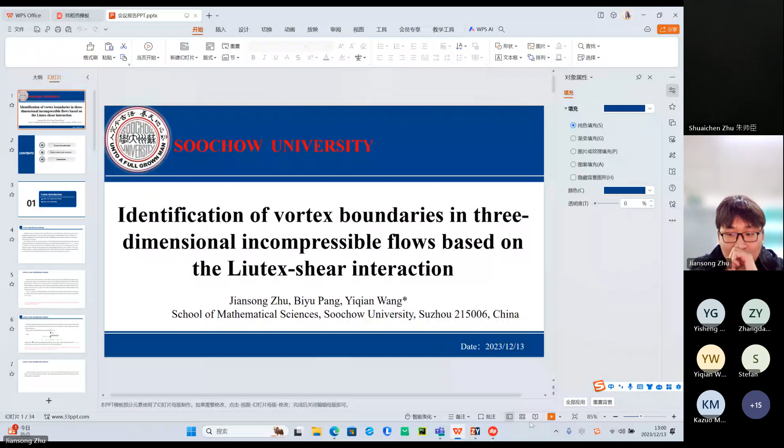Okay. Can you hear me? Yes. Okay. Can you see the screen? Oh, yeah, we can. Okay.

Hello, everyone. I'm Jiansong Zhu from Soochow University in China. I am a first-year graduate student. This is my first time to attend an international conference. I am a little nervous, please forgive me. The topic of my report is identification of vortex boundaries in three-dimensional incompressible flows based on Liutex-shear interaction. This report is divided into three parts: Liutex introduction, observation and analysis, and conclusion.

First of all, Liutex introduction is divided into two parts: other vortex identification methods and Liutex vortex identification.

Although vortex is ubiquitous, it has been difficult to give a stricter definition. The first generation of vortex identification method equates vortex and vorticity, resulting in indistinguishable vortex. Therefore, it is obviously inappropriate for the first generation vortex identification method based on vorticity to represent or capture the vortex structure. In the 1980s and 1990s, the second generation of vortex identification methods

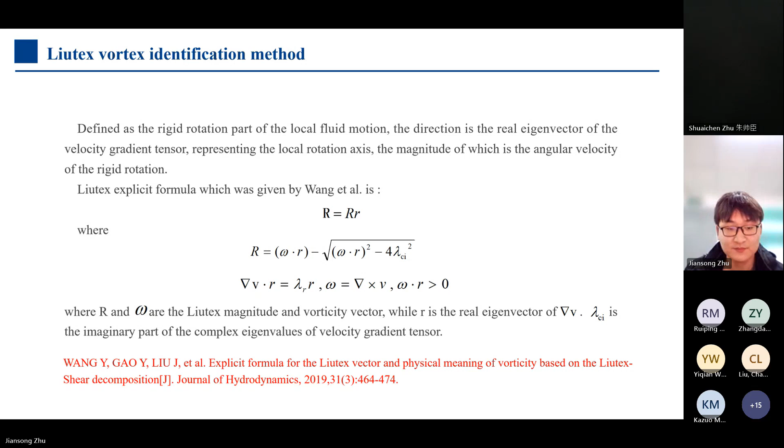A special feature of the Liutex system is that vorticity is strictly decomposed into the rotation part, the Liutex vector capital R, and the residual shear part, capital S. This relationship can be used to study the interaction between fluid rotation and shear in various flows.

Next, I will talk about the advantages of the Liutex method. As the third generation vortex identification method, Liutex greatly outperforms the previous two generations, mainly reflected by: one, the Liutex vector is an accurate representation of the physical quantity of vortex with a clear physical meaning; two, the vortex identification method represented by Liutex solves the problem of threshold selection for the second generation vortex identification methods; three, the Liutex method is able to quantitatively represent the six elements of vortex.

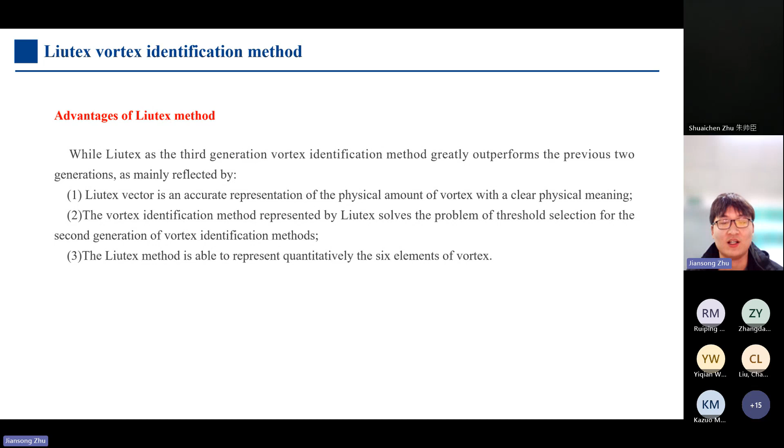Okay, the following is the observation and analysis, which is also divided into two parts: the Liutex shear interaction equation, and the ISO surface and slice of Liutex in flow around the 3-dimensional cylinder.

In order to study the relationship between Liutex and shear, the vorticity transport equation can be used to formulate a governing equation for Liutex in 3-dimensional incompressible flows with a source term depending on the residual shear.

The vorticity transport equation for incompressible flow is: capital D omega divided by capital DT equals omega times (nabla) times V plus nu times (nabla) squared omega.

With the Liutex shear decomposition, the equation can be reformulated as: capital DR divided by capital DT equals capital R times (nabla) times V plus nu times (nabla) squared capital R minus capital DS divided by capital DT plus capital S times (nabla) times V plus nu times (nabla) squared S, which equals minus capital DS divided by capital DT plus capital S times (nabla) times V plus nu times (nabla) squared S.

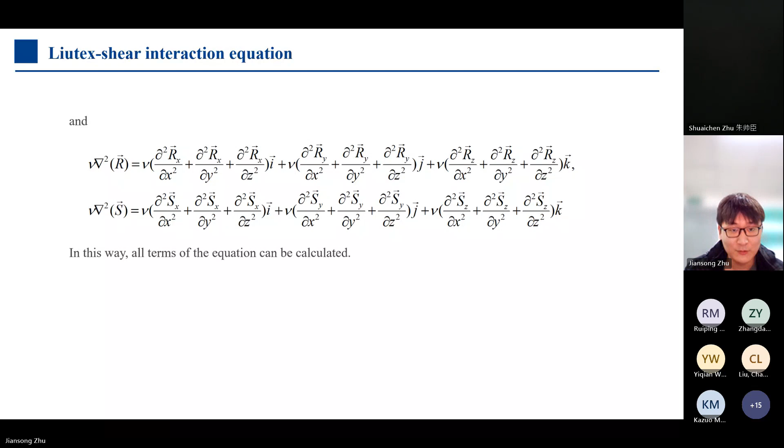This we will call the Liutex shear interaction equation. Here R and S are Liutex and shear. The term capital DR divided by capital DT is the material derivative of Liutex, while nu times (nabla) squared capital R is the dissipative term, and B is the source term, representing the influence of shear on the evolution of Liutex.

The source term B contains the material derivative of capital S, the non-steady term, and the dissipative term of shear. Of course, the equation can be formulated the other way around, combining all Liutex-related terms as the source term, which represents the influence of Liutex on shear. However, in the current study, we will focus on the influence of shear on Liutex, as we are more interested in the dynamics of Liutex.

I investigated unsteady flow around a three-dimensional cylinder with Reynolds number of 300. Its computation domain includes 257 by 128 by 32 grid points in the X, Y, and Z directions. Direct numerical simulation (DNS) is used, and the immersed boundary method (IBM) was used to simulate the cylinder boundary.

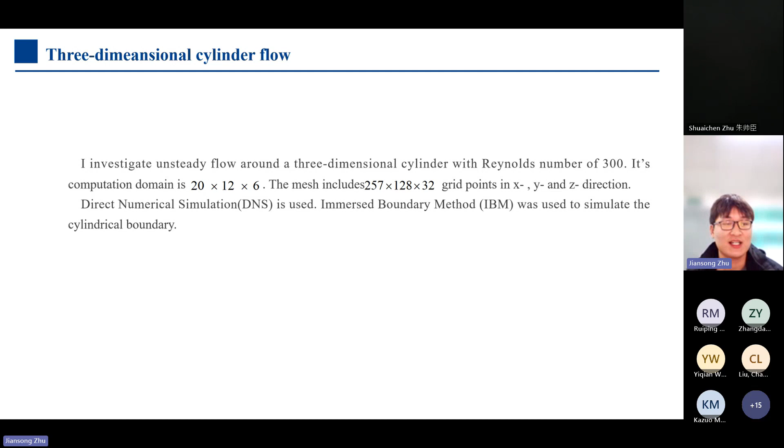Okay, next we take a look at the slice diagram of Liutex component in the x-axis direction. In a three-dimensional cylinder flow, we can see the center of the vortex is positive and the boundary is negative.

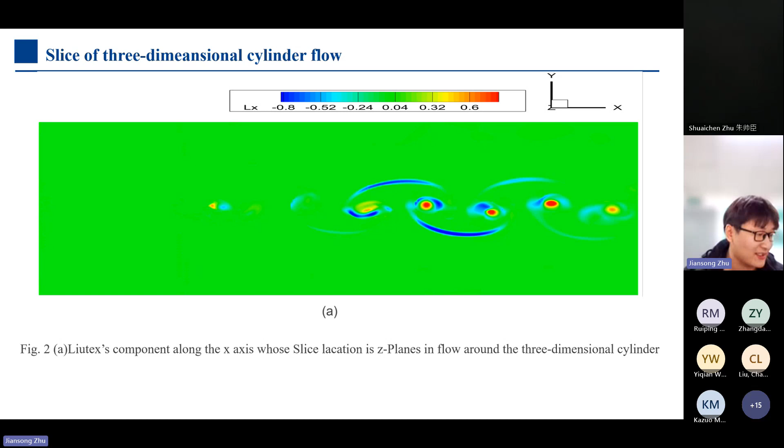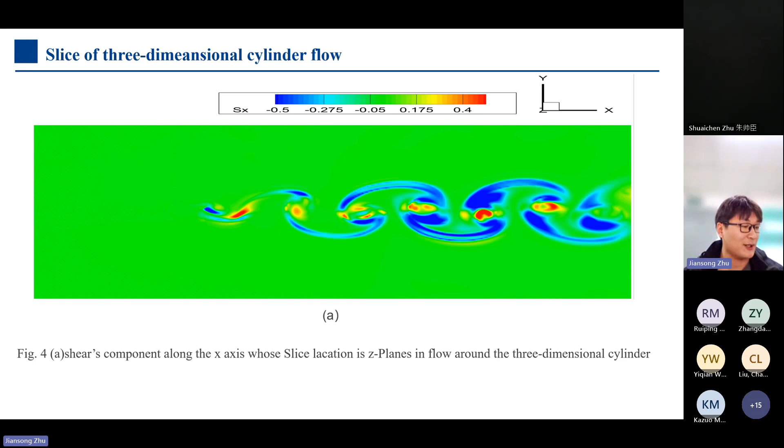Next is the slice diagram of the shear component in the z-axis direction. Compared with figure 2c, the sign of the vortex is roughly the same. By observing Liutex,

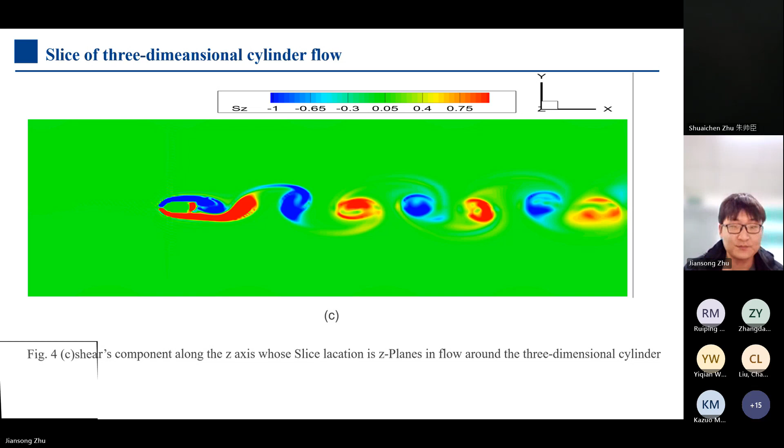the viscous term shear component along the XYZ axis, whose slice location is Z planes in flow around the three-dimensional cylinder, we can conclude that the slice diagram of the components in the Z-axis direction is similar to the two-dimensional case.

So next, I will analyze the slice diagram of Liutex source, Liutex source viscous term, and material derivative of shear component along the z-axis direction, separately, to see if there are similar conclusions to the flow around the two-dimensional cylinder.

Next I compared the viscosity of Liutex source with the viscosity and material derivative of shear in the z-axis. It can be observed that in the Liutex z-axis component distribution, on the vortex boundary recognized by Liutex, the viscosity in the z-axis component is opposite to the sign of Liutex in the z-axis component.

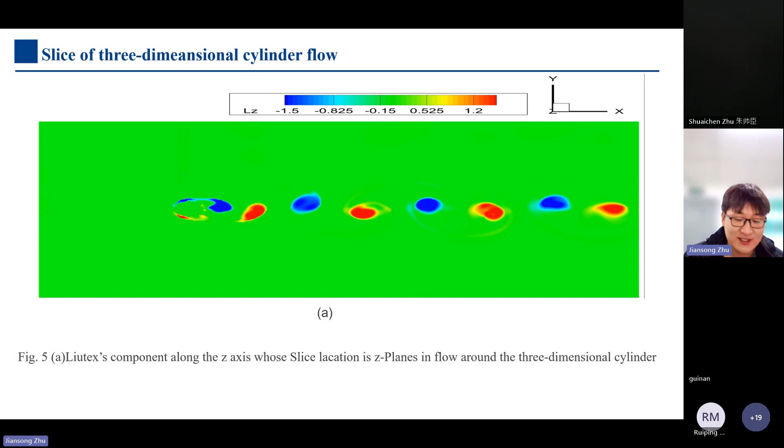It shows that there may be a strong dissipative effect on the boundary.

By comparing the slice diagram of the components of source and the material derivative of shear along the z-axis, it can be concluded that the slice diagrams are roughly similar in distribution. The source term in the z-axis component is mainly contributed by the material derivative of shear component in the z-axis direction, while viscosity in the z-axis contributes less, as shown in figure 5a.

This is the slice diagram of the Liutex component along the z-axis, whose slice location is z planes. The distribution of the source term's component along the z-axis is shown in figure 5b.

First, it is clear that the influence of residual shear on the Liutex evolution is concentrated in those shedding vortex areas, outside which the interaction is rather weaker.

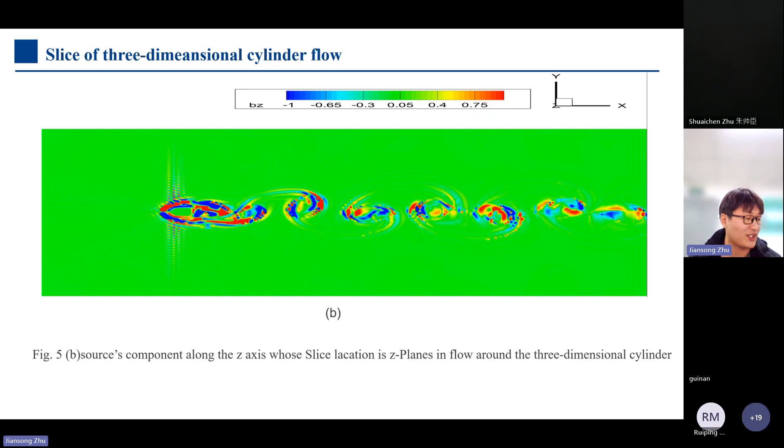Based on the interaction mechanism between Liutex and shear, we find that viscosity acts on the vortex boundaries in figure 5c. I thus conjecture that the vortex boundaries can be identified by those high dissipative boundaries.

Based on the interaction mechanism between Liutex and shear, we find that viscosity acts on the vortex boundaries in Fig 5C. I thus conjecture that the vortex boundaries can be identified by these high dissipative boundaries.

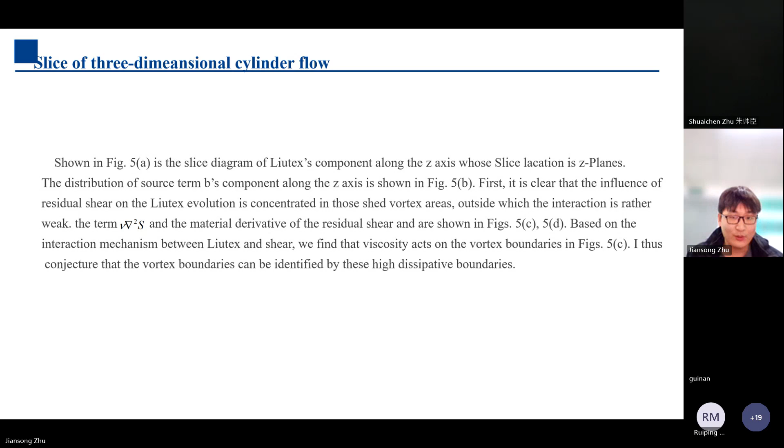Okay, I see. In the following, I try to compare the situation of flow around a two-dimensional cylinder, and we can get the following conclusion.

It is revealed that such boundaries exist: outside, the shear has a trivial impact on the evolution of Liutex, and inside, enhancing and weakening effects of shear on Liutex can be observed. In addition, there is a strong dissipation effect upon Liutex on these boundaries.

In the following, I try to compare the situation of flow around a two-dimensional cylinder, and we can get the following conclusion.

Liutex is the exact mathematical definition of fluid rotation or vortex, which is the only one that correctly represents fluid rotation or vortex.

I conjecture that vortex boundaries might be identified by these high dissipative boundaries, like the flow around the two-dimensional cylinder.

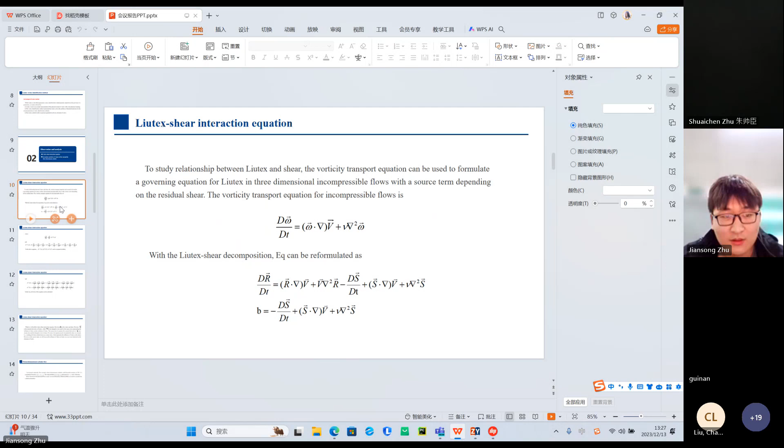I'm just a little confused. Then you try to explain each term. Go to next. Go to next. Yes. Well, let me see. They're here, not only here, everywhere.

So what does it mean, Rx? What does it mean, Rx, or what does it mean, Vx? Rx is... no, I know your definition. R is Liutex. What is Rx?

Rx is the component of R along the X axis. So that means it's R's projection in the X direction, or components of R, right? Well, then Vx, Vy, Vz - I think when you hear Vx, Vy, Vz, they're not the same as U, V, W, but they're all...

Scalar. They shouldn't be vector. So if you look at the Rx vector, you have a head, a vector head - you put the vector symbol there. We know R is a vector, but Rx is not a vector. Rx is a component, a number, or a scalar, not a vector. I think you have a similar problem throughout your presentation. We need to know that R is a vector, but Rx is a component. This component is a number, or we say it's a scalar. So I think we cannot use this vector notation to represent the component.

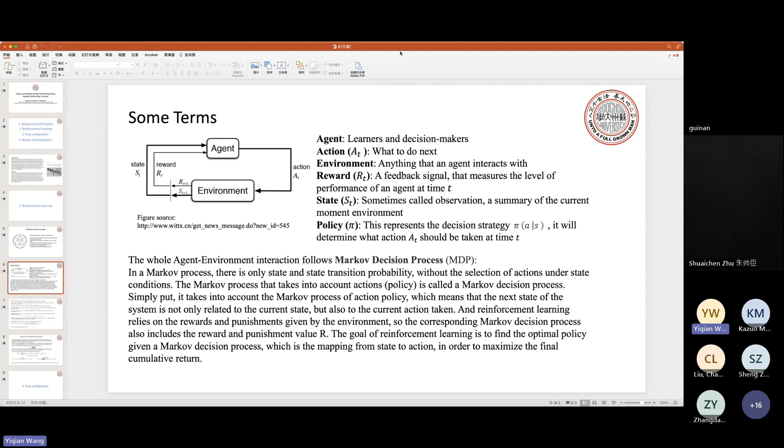Your screen never changes. Your screen never changes. Never changes. Yeah, now it changed. Okay, maybe I should share the whole screen. Okay, share whole screen. Okay, so now, okay, yeah, I changed - see the screen. Okay, screen changed.

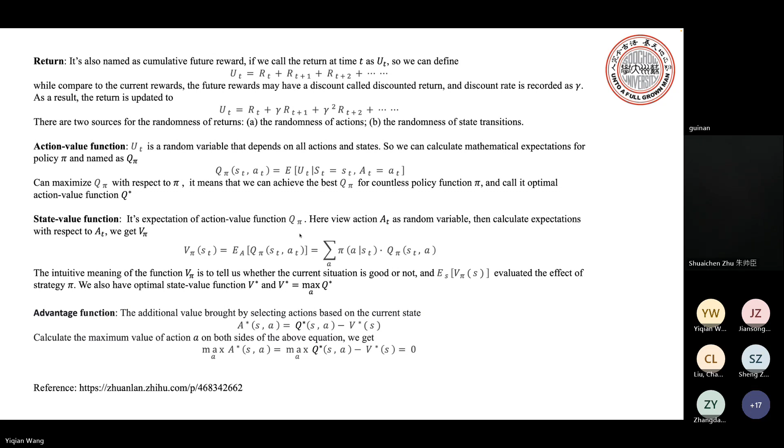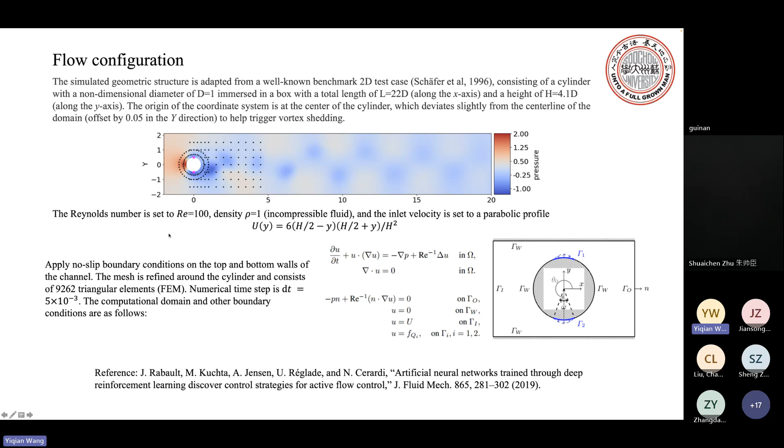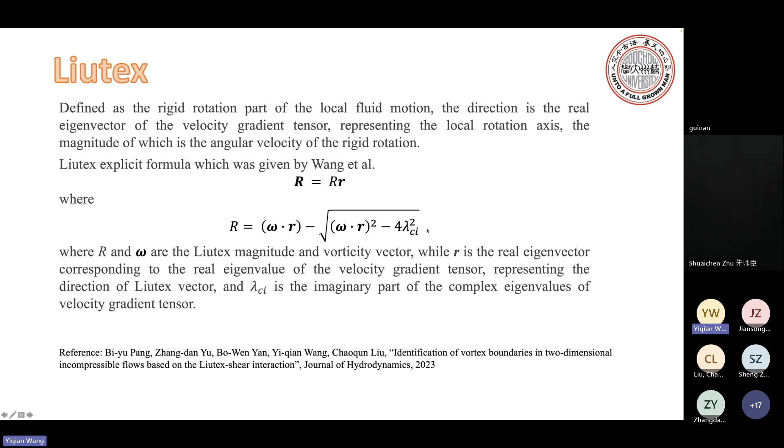We want to try a second approach - to put Liutex, which we believe is the sinews and muscles of the flow, and use that as the information from the sensor points. So we are using Liutex as states rather than pressure as in the previous reference. And I believe the work is ongoing.

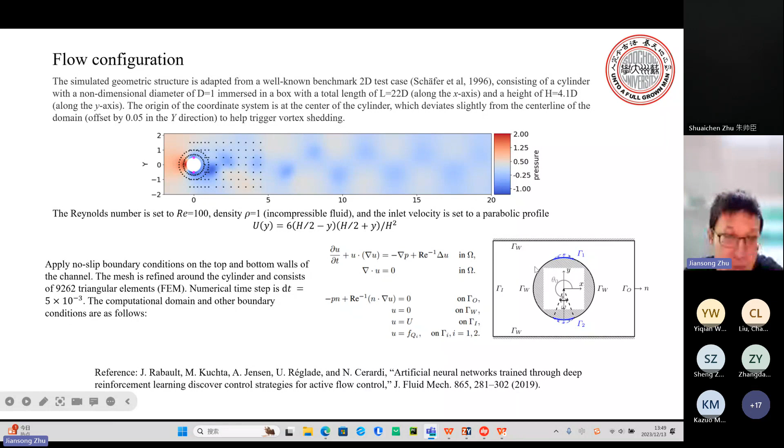You can see the picture. We have given agent, state, and action. Just the reward function is left.

Due to the strong correlation between Liutex and vortices, our desire is to reduce the impact of vortices. So combining Liutex and reinforcement learning is the way to investigate flow control.

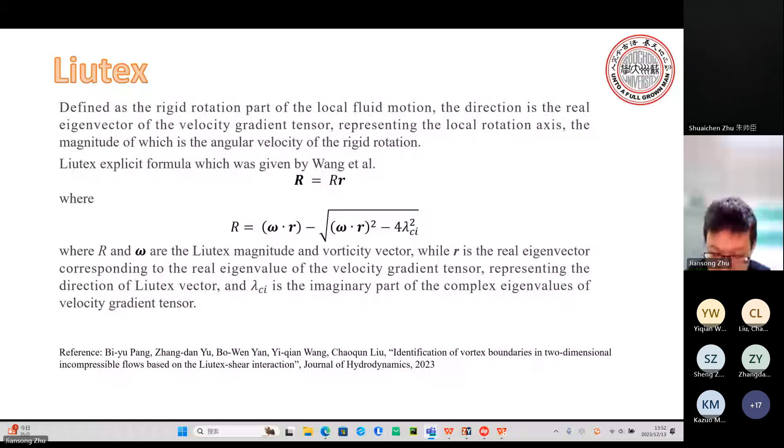0.164, and then during training, the drag decreased to around 0.159. And it makes some drag reduction.

But there are some errors, maybe. I think if there is any other information contaminating the data, it could influence the control strategy. So that's for future research.

My expectation is that we want to do more research on flow control by reinforcement learning. First, we can change the probe positions to extract different flow information and send it to the agent to learn a better control model.

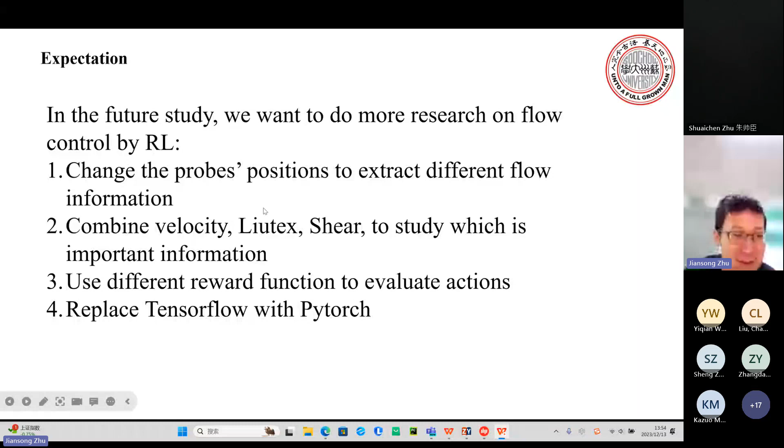Okay, this is all my presentation, my topic. And in the end, welcome to our conference next year in Suzhou, China. Welcome everyone. Okay, thanks for listening.

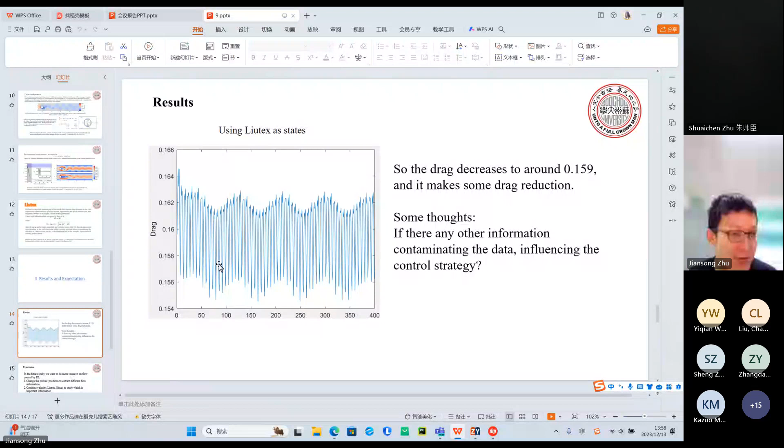Okay, actually our idea is to replace original information by Liutex, which we thought would be more reflective of the flow structures. That's the only idea behind this work, and it is still ongoing. I think you assume Liutex is more important to the frequencies - sounds to me like it relates to the frequency change. But this needs further study.

Yes, thanks, Dr. Liu.

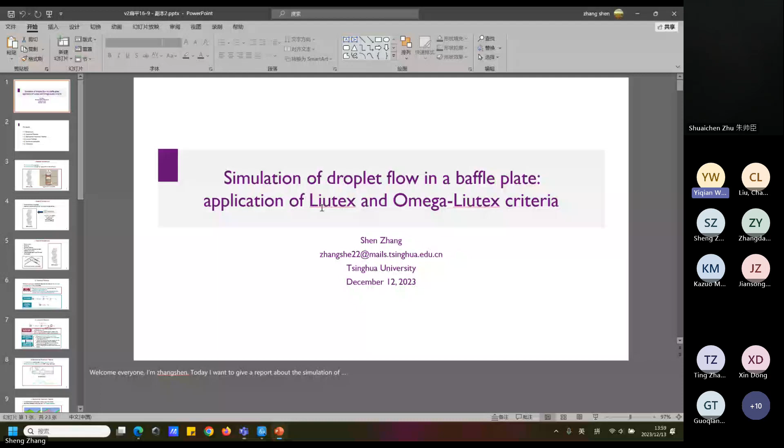Hello, can you hear me? Yes, we can hear you. Can you see my screen? Yeah, okay, I'll start. Hello everyone.

Today I want to give a presentation about the simulation of a wave plate. This is the wave plate - it is used to remove water from the airflow. For example, if the airflow enters the tortuous channel from below, most droplets will hit the plate and become a liquid film and flow down, thereby increasing the dryness of the airflow, and this is what we want.

The performance of the wave plate is generally evaluated by two indicators: the first is the steam water separation efficiency, the second is the pressure drop. The higher the separation efficiency means this wave plate can remove nearly all the water from the airflow.

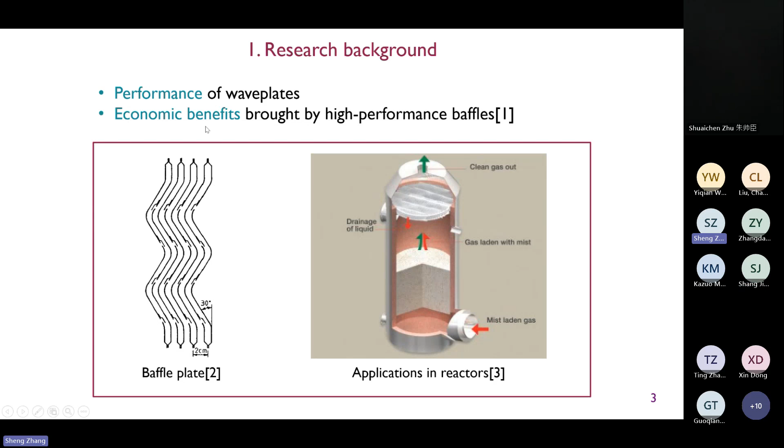Why do we need the air to be dry? Because the turbine will have a higher working efficiency in a dry environment. It is said that if the separation efficiency of this wave plate increases by 1%, then the power of the power plant will increase by 0.25%. So a good wave plate can bring us economic benefits.

Most simulation about this wave plate is based on Fluent and CFX, this kind of commercial software, but this work is done by OpenFOAM - it's open source software. It will involve lots of different physical phenomena when modeling the two-phase flow.

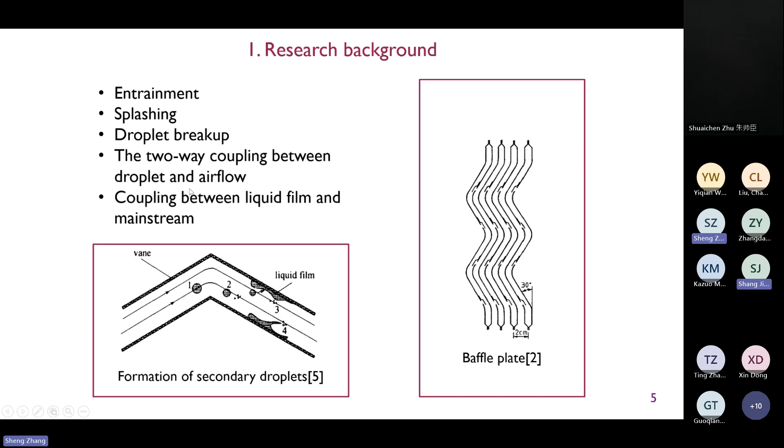For example, this is the liquid - if the airflow can blow the liquid into small droplets, like that, this phenomenon is called entrainment. In addition, if a droplet hits the wall, it does not necessarily become a liquid film - it can also become several smaller droplets. In addition, we need to consider the two-way coupling between the two phases, because the airflow can apply a drag force on the droplet, and the drag force will maintain the motion of the droplet, and the counter force of this drag can also produce turbulence in the airflow too.

In this case, I use two different turbulence models to calculate that. The first is the standard K-Epsilon model. It's very popular and is able to predict the flows in the mainstream area well. The second is the K-Omega SST model. It combines the advantages of the K-Omega model in the near wall region and the K-Epsilon model in the free stream.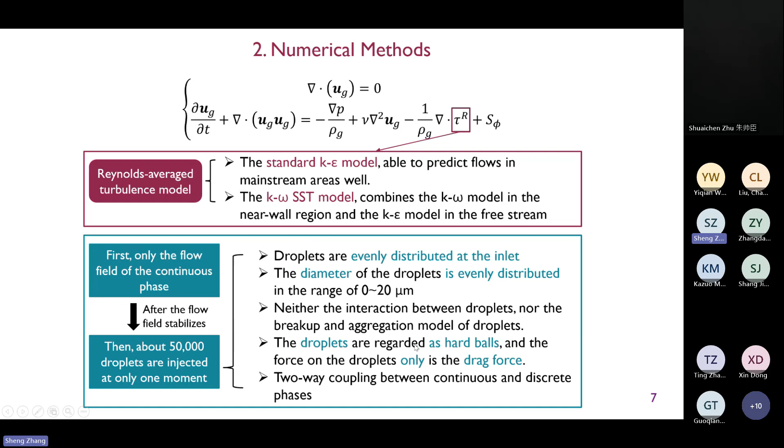Initially, it only has the continuous phase. When the continuous phase stabilized, I will inject droplets into this computational region. This is the assumption of the droplets. We consider the two-way coupling between these two phases, and the droplets are considered as hard spheres.

This is the geometry we want to compute. It's a two-dimensional baffle plate case, and we wanted to create a full hexahedral mesh on this geometry. In addition, our boundary has boundary layer mesh. The difficulty is that I have to create a boundary layer mesh on this thicknessless face. This thicknessless face is the hook blade.

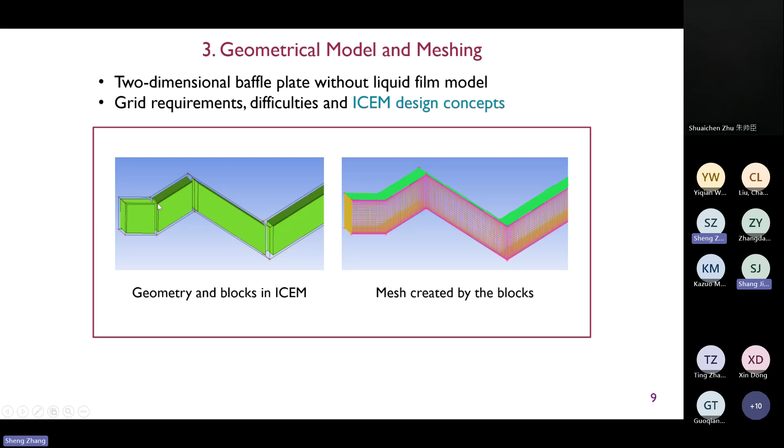So I'll first introduce some basic ideas about the ICEM. This is the block in ICEM. Blocks must be hexahedral, so if the blocks fit the geometry very well, the mesh quality will be very high. To meet our requirement, I'll first add some auxiliary lines to the original geometry. This is the auxiliary line, used to associate the vertex of the block to the points of this geometry.

With this line, we use a strategy called the bottom-up strategy. It means I first create a small block to fill this region, then create a new small block near the previous block to fill the next region, and repeat the process until all the region is filled by blocks. So this is the result. This is the geometry, these are the blocks, and this is a mesh based on these blocks.

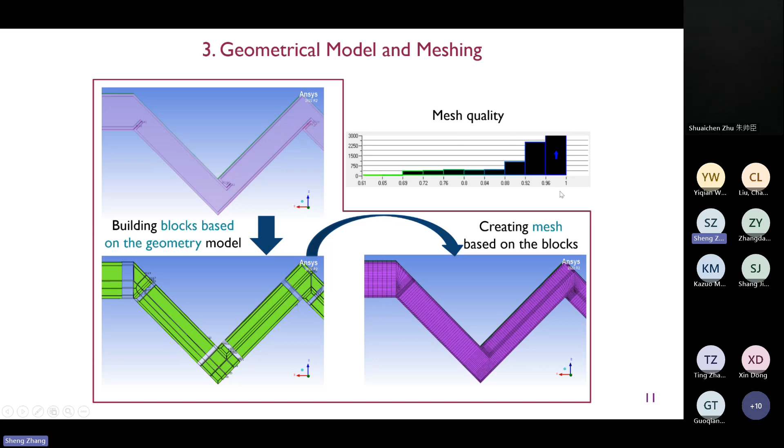You can see all mesh is hexahedral, and our boundary has the boundary layer mesh, and its quality is very good. Most of them are about 0.95. Then we can start calculation, but we still have to write the steam-water separation efficiency calculation program by ourselves.

Initially, I wanted to design this program as a post-processing program, but then I realized I couldn't do that. So I started collecting droplet information during the two-phase flow calculation process. That means I need to implement the code in the solver. This is the workflow of this program, but I want to explain it through an example.

If n bin is equal to 5, this means I will have 5 bins - this is the first, second, third, up to 5. The first bin is this range, and then I inject 10 droplets at the inlet. This is the diameter of each droplet, but at the outlet we just find, for example, 3 droplets. This is the diameter of the 3 droplets, which means 7 of the droplets have been removed by the equipment. So its total separation efficiency is about 70%. But we still want to know its separation efficiency in each bin.

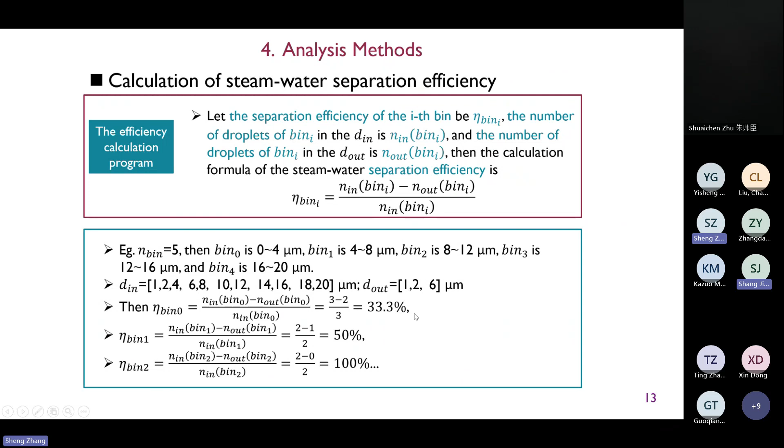For example, for the first bin, we inject 3 droplets but we just get 2, so its separation efficiency is 33%. And for example, the third bin, we inject 2 droplets, but none of them we find at the outlet, which means all particles have been removed by the equipment. So that's very good - the separation efficiency is 100% for this bin, and so on.

Then I want to introduce the result of the discrete phase. The orange point is the experimental data. Let's see, the K-Omega SST model gives better results than the K-Epsilon model, and the dense mesh has better results.

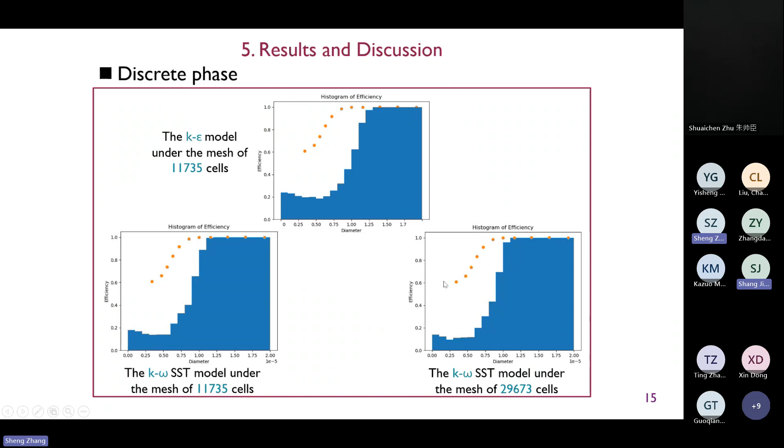When the diameter is bigger than 10 microns, the separation efficiency is nearly 100%, but when it's less than 10 microns, it will decrease. Then this is the result of the continuous phase.

The presence of the hook blade makes the fluid accelerate strongly, and the acceleration makes the droplets directly hit the wall behind the tips. This is what we want. This is good for the separation.

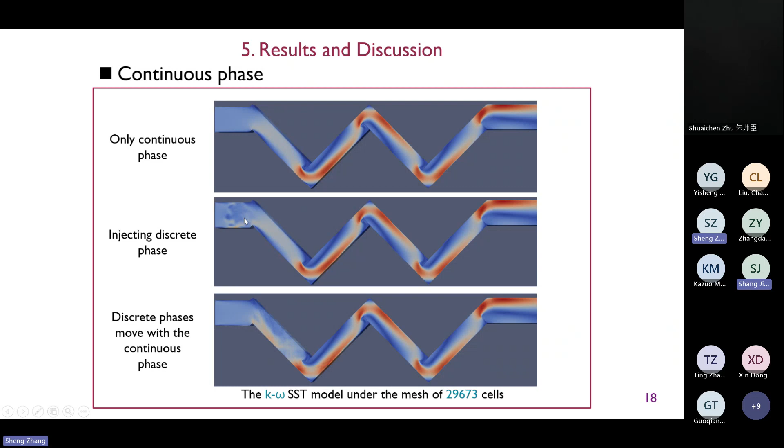If we zoom in, we can see the recirculation clearly. And in these pictures, we can see the influence of the droplets, or the discrete phase, on the continuous phase. The discrete phase flows with the airflow.

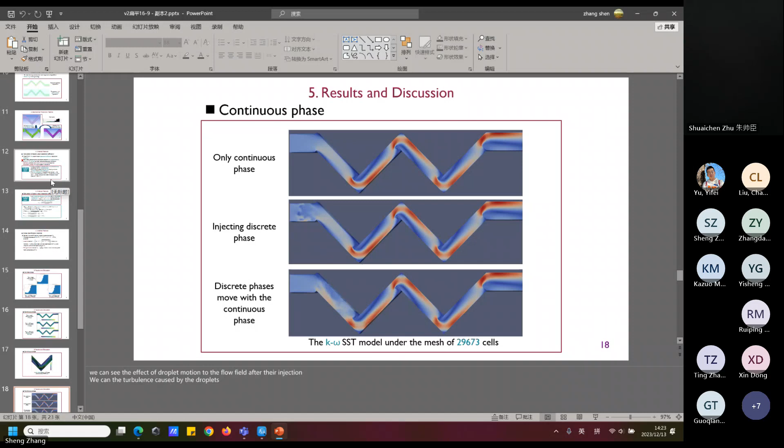complicated, and also I don't fully understand your turbulence model. But you say K omega SST is the best. Is that correct? Yes, this one is better than this one. Well, the K epsilon model apparently has a problem because when you go near the wall, epsilon is 0.

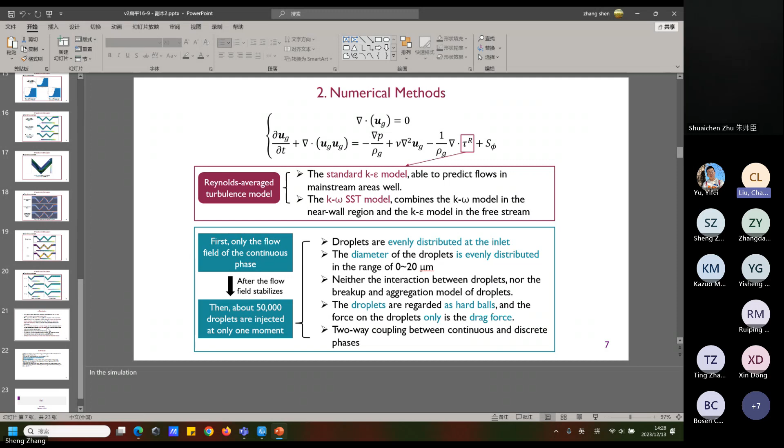I'm not sure, because it didn't adjust the threshold. Threshold, yeah, if we just adjust the threshold, I believe the results would be very similar. Yeah, because you don't use the same threshold. They don't have the same. In general, Liutex should be better because it would treat the shear as well at the same time. So you may just move on to the other speaker.

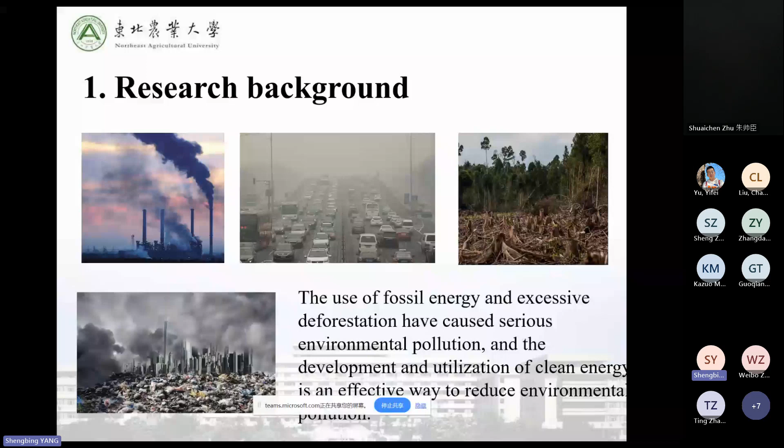With the application of fossil energy, environmental pollution is becoming more and more serious, so exploration of clean energy is imminent. The clean energy sources that have been scaled up internationally for power generation are hydroelectric power, wind power, solar power, and geothermal power.

Wind energy has become one of the mainstream directions of clean energy development due to its wide distribution, easy capture, and the relative maturity of wind energy technology. The installed capacity of wind power is increasing by year, and the installed capacity in China, whether offshore or onshore, is a large number.

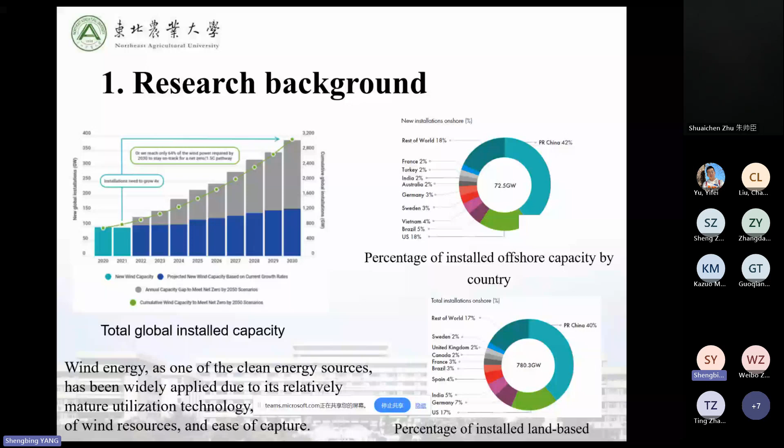Wind turbines are mainly divided into lift-type wind turbines and drag-type wind turbines. Lift-type wind turbines are divided into horizontal axis wind turbines and vertical axis wind turbines, of which horizontal axis wind turbines have the highest wind energy coefficient, occupy a large market, and have become one of the mainstream models.

Although the wind energy coefficient of the vertical axis wind turbine is lower than that of the horizontal axis wind turbine, it has attracted attention in urban environments in recent years because of its ability to utilize wind from any direction, regardless of the wind's direction. Drag-type vertical axis wind turbines have the lowest wind energy coefficient among all wind turbines, but have larger output torque, and are used in many applications such as water lifting for irrigation and similar tasks.

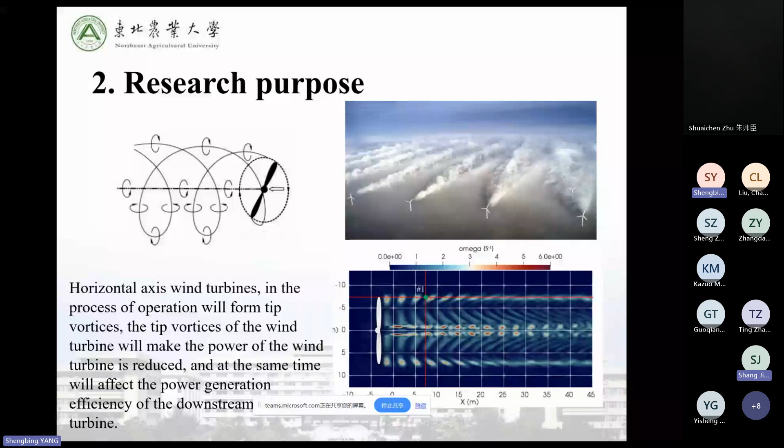To limit the tip vortex of the horizontal axis wind turbine, many scholars have studied this, and many new models have been proposed, for example: suction surface blended winglet, pressure surface blended winglet, flat plate winglet, elliptic blended tip, and other methods used to limit the generation of the blade tip vortex. These methods are effective in limiting the generation of the blade tip vortex in horizontal axis wind turbines, but will increase the difficulty of blade manufacturing as well as increase the energy cost.

For this reason, this study proposes a method to limit the vortex at the tip of the horizontal axis wind turbine by creating an opening connecting the leading edge of the blade tip and the tip of the blade. At high velocity at the tip of the blade when the horizontal axis wind turbine is in operation, the airflow at the leading edge of the tip is injected from the tip of the blade through this opening. This limits the generation of the tip vortex.

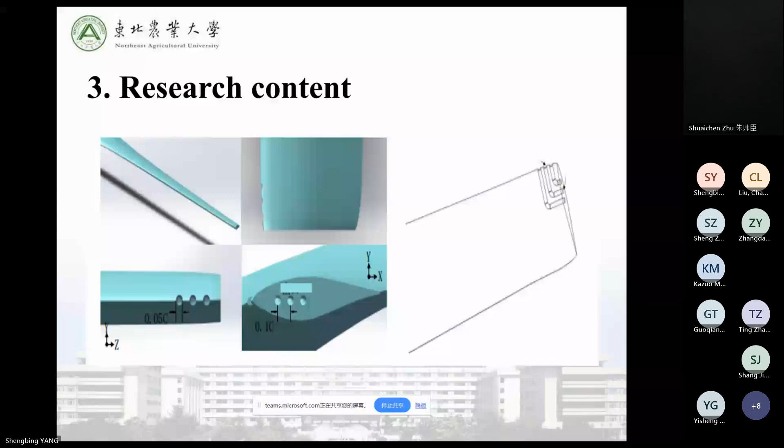The stationary domain and the rotation domain use the interface surface for data exchange. The computation domain is divided by a structured grid as shown.

In order to verify the reliability of the numerical simulation, the computed results of 3 turbulence models are compared with the experimental values reported in the literature. Grid independence and time step independence are achieved.

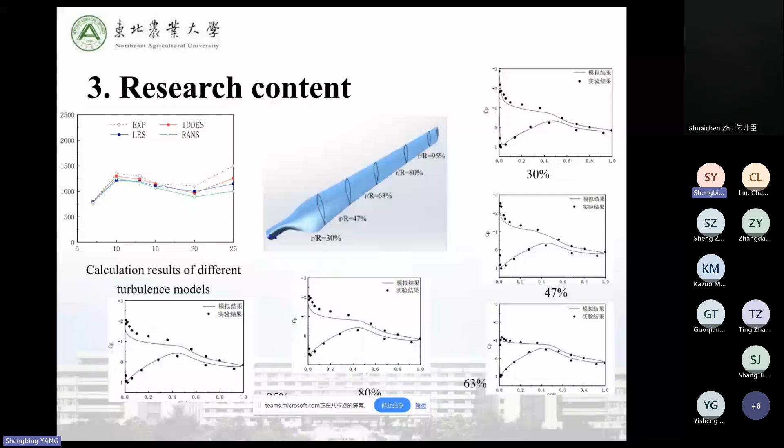Taking into account repeatability according to the type of orthogonal design, only 9 tests need to be carried out, which reduces the amount of calculation and saves a lot of time.

When the rotation speed of the wind turbine is less than 900 RPM, the power of both the tip-perforated wind turbine and the original wind turbine increases with the increase of rotation speed, and the power of the tip-perforated wind turbine increases.

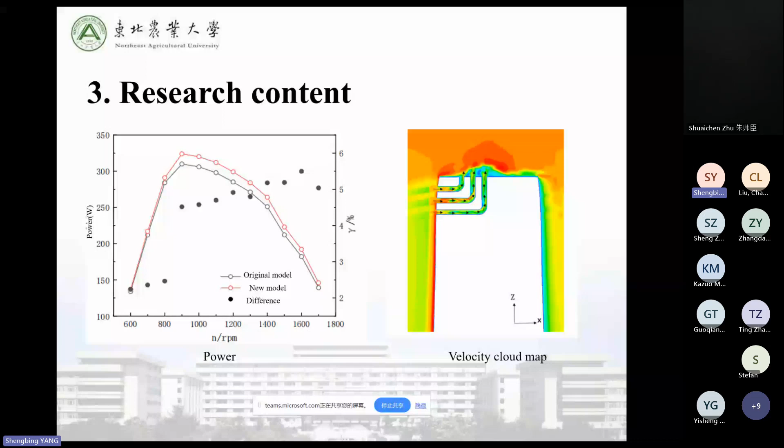The flow line diagram of the pressure side and suction surface of the blade for the original model and the open hole model are shown when the rotation speed of the wind turbine is 600 RPM.

The pressure surface of the blade is in a laminar flow state and no flow separation occurs. The suction surface of the blade has a larger area of flow separation, showing a clear tendency of flow from the root of the blade to the tip of the blade.

This is because the blade root suction airflow has a positive torsion angle relative to the tip suction airflow. The angle of attack at the blade root suction is large.

The blade suction surface has a tip pressure gradient, and at the same time the centrifugal force drives the rotation of the wind turbine, causing the flow to separate in the direction of the blade.

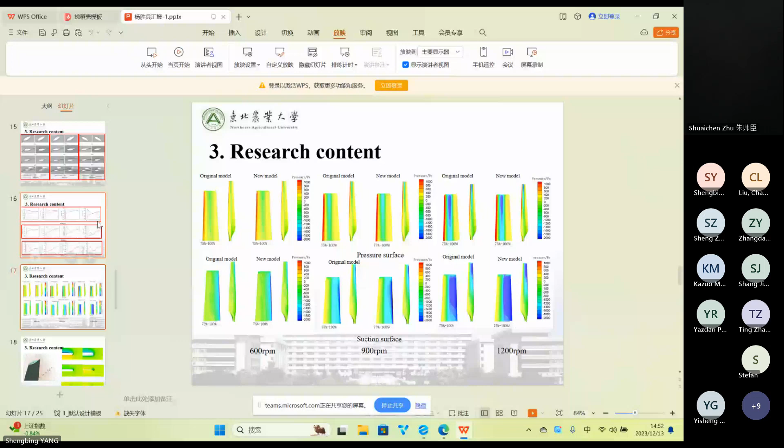Yeah, it changed. Go back one more, you go back. Well, you should be able to use, what is it called, the slideshow? You should click something. Fine, yeah, it's a little changed. You don't have enough time, so. But you talk a lot, but we cannot see it on your screen.

This is another talk. No, your talk.

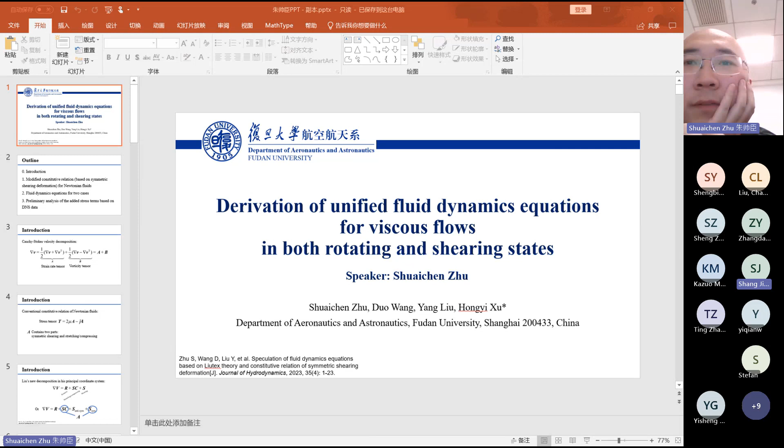Okay. Can you see my slides? Yeah, we can. Okay.

Thank you. Hello everyone, my name is Zhu Shuaichen. Good morning, good afternoon, good evening. I'm from Fudan University, Department of Aeronautics and Astronautics, and the title of my speech is Derivation of Unified Fluid Dynamics Equations for Viscous Flows in both Rotating and Shearing States.

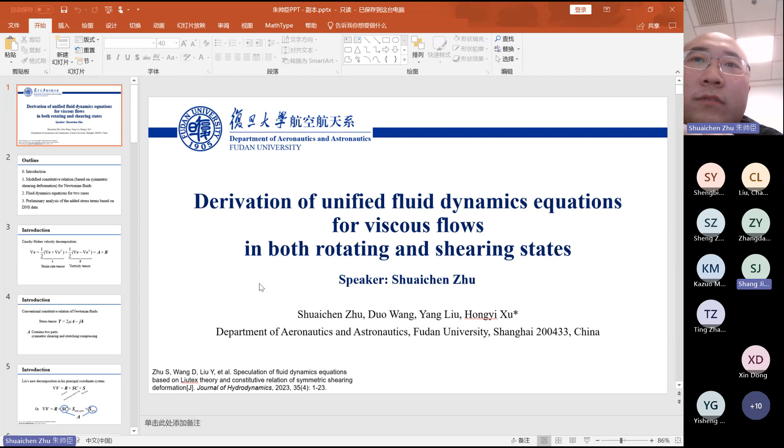This paper was published in the Journal of Hydrodynamics in September, and I'm the first author, and my supervisor, Xu Hongyi, is the corresponding author. Now I will introduce the outline of my speech.

Firstly, I will introduce some background. Secondly, the first part is the modified constitutive relation for Newtonian fluids, based on symmetric shearing deformation. The second part is the fluid dynamics equations for two cases. And the third part is some analysis of the added terms based on our DNS data.

Okay, let's begin. We know that in traditional fluid mechanics, the velocity gradient tensor can be decomposed into two parts, which is called Cauchy-Stokes decomposition. The first part is A, and the second part is B. A is the strain rate tensor, which is symmetric, and B is the vorticity tensor, which is antisymmetric. So in traditional fluid mechanics, A stands for strain rate, which is the deformation for one point in the flow field, and B is the rotation.

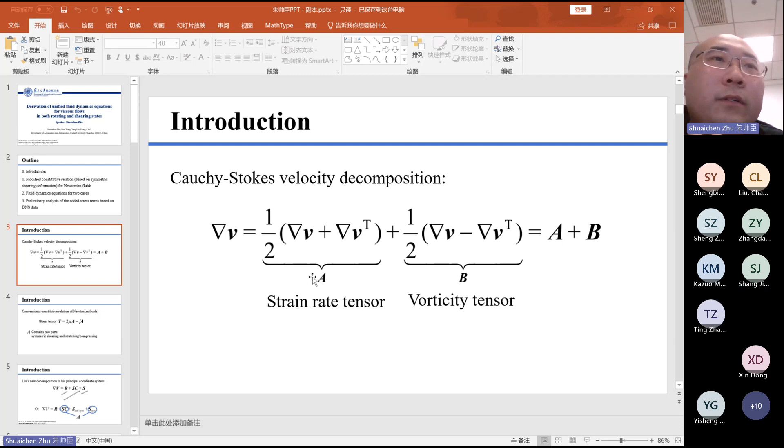This is the conventional constitutive relation of Newtonian fluids for traditional fluid mechanics. T equals this. T is the stress tensor, and A is the symmetric tensor, which is the strain rate tensor. We know that A contains two parts: symmetric shearing and stretching or compressing. So conventionally, people thought that the stress tensor is related to two parts: one is shearing and another is stretching or compressing.

But by now, no experiment could prove that stretching or compressing can produce stress in fluids. So we proposed that we should subtract this part, the stretching-compressing part, or SC part for short, and only the symmetric shearing part remains. So specifically, how to do this?

I will introduce Liu's new decomposition in the principal coordinate system. In Liu's paper, he said that in the principal coordinate system, the velocity gradient tensor can be decomposed into 3 or 4 parts. 3 parts are rotation, stretching or compressing, and shearing.

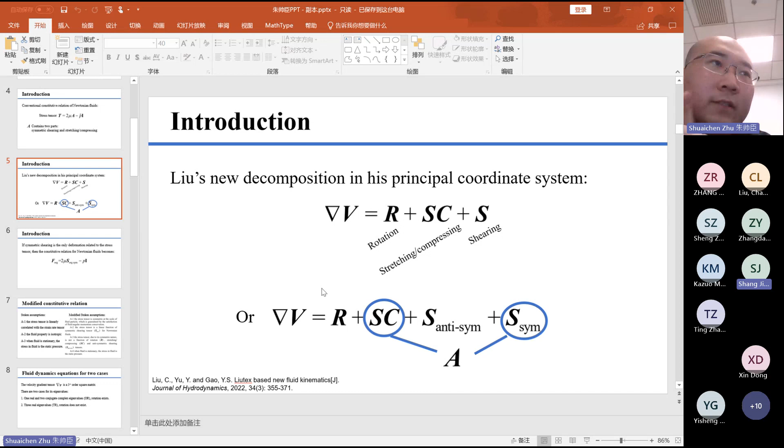If we remove SC from the traditional constitutive relation, the constitutive relation changes to this, where S sym replaces A in the traditional one. The ORG here stands for original coordinate system, because this decomposition is done in the principal coordinate system.

But if governing equations are written in a coordinate system, it should be an original one. So we should rotate the coordinate system to the original coordinate system. Based on the analysis before, we can have the modified constitutive relation.

So we modified the Stokes assumptions. Traditionally, Stokes assumptions include 3 assumptions, from the 19th century. The first is that the stress tensor is linearly related to the strain rate tensor. The second is that the fluid property is isotropic. The third is that when fluid is stationary, the stress in fluid is the static pressure.

We keep the third assumption not changed, so we write this assumption like this, the fourth modified Stokes assumption. For the first assumption, the linear relation, we keep the linear relation, but how to describe the linear relation is the core issue, so we change it a little.

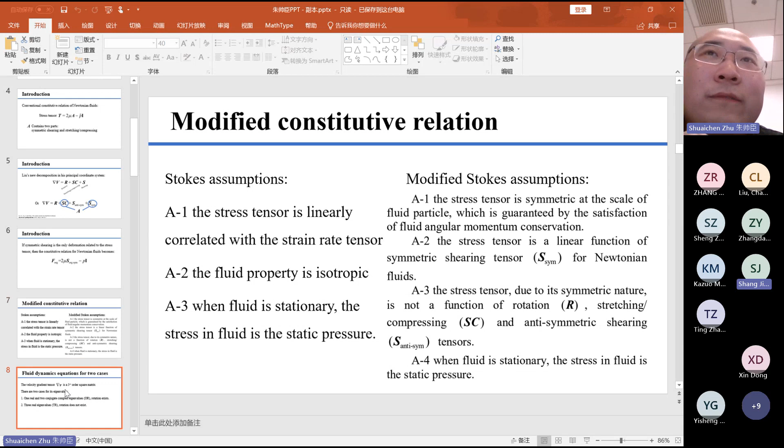Based on the modified constitutive relation, we can derive a new set of fluid dynamics equations. First of all, we should clarify that we have two cases, because the velocity gradient tensor is a third order square matrix, so there are two cases for its eigenvalues.

The first case is one real and two conjugate complex eigenvalues. Under this case, rotation exists, so we can call it the rotating state, or for simplicity, OR, where O stands for one and R stands for real.

The second case is three real eigenvalues, TR for short. Under this case, rotation does not exist, so only shear exists, and we can call it the shearing state. First of all, we derive the equations for the OR case.

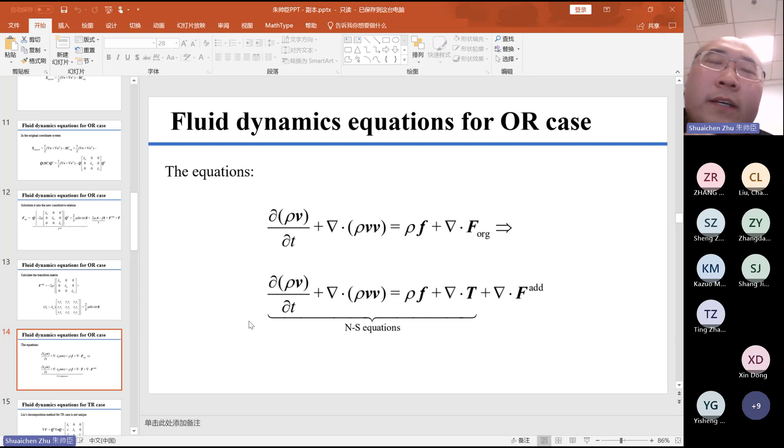This is the equations for the OR case. Now let's move on to the case of TR. Actually, for the TR case, Liu and his team proposed a decomposition method.

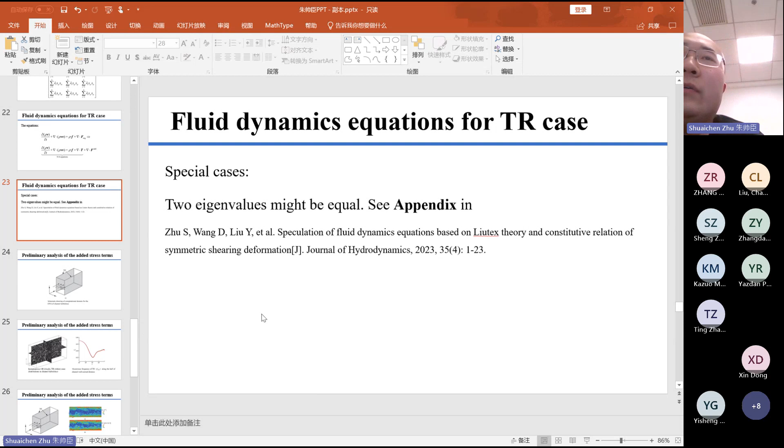So after getting the new fluid dynamics equation, we should evaluate this term, right? This term, because this is the difference between the NS equation and the new equation. So we use some DNS data to do some elementary analysis of this term.

I will introduce them. The data we choose is a channel turbulence, turbulence flow in the channel.

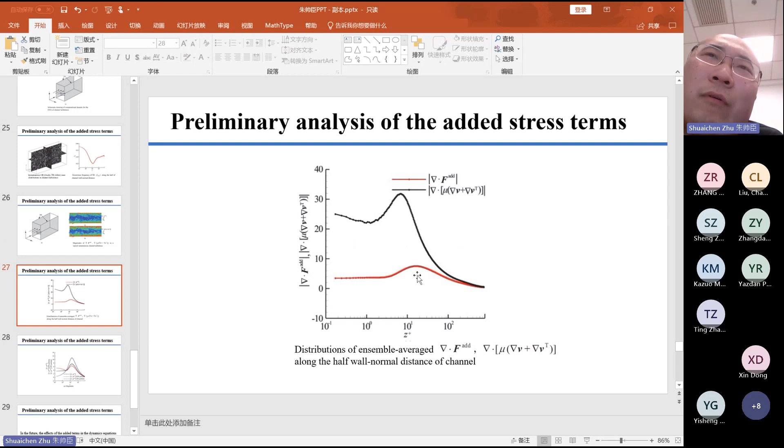If you do some statistical analysis, you can get this picture. We can see that, generally or statistically, the magnitude of the added term is about 1/10 of the magnitude of the viscous terms. So we expect that it will have some effect on the results of DNS simulation.

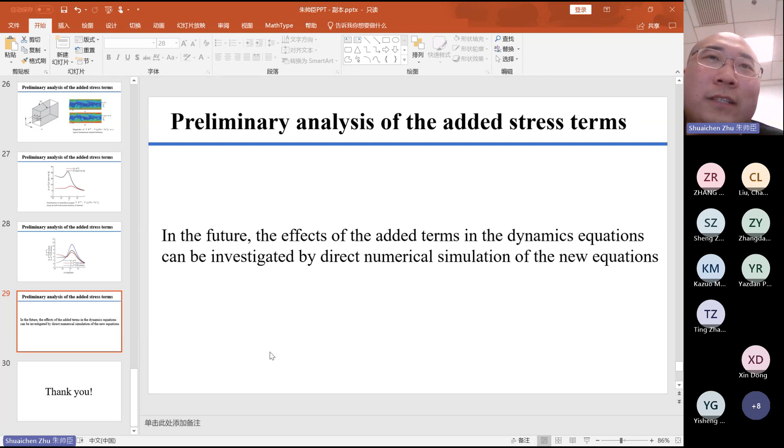That is all my speech. In the future, the effects of the added terms in the dynamics equations can be investigated by direct numerical simulation of the new equations, and this simulation is being done by our computer now. I think in the next month we can get the elementary analysis of our data. Thank you very much.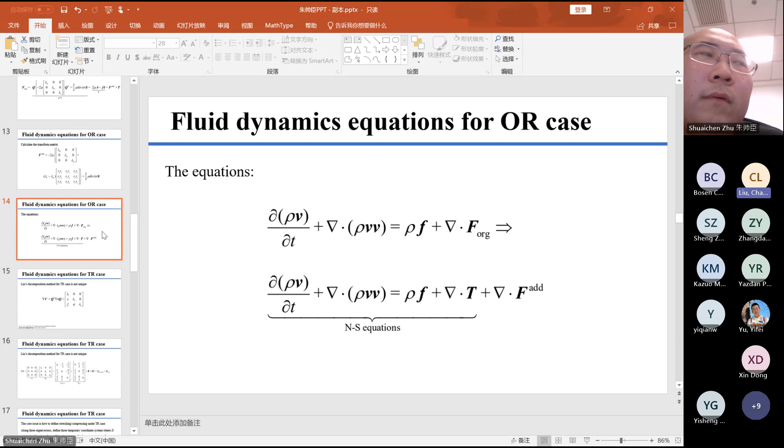The second question is you look back at your stretching terms, SC1, SC2, SC3. You look back to that. I think there's some problems there. SC1, but you can separate these terms, but next step you try to use eigenvector. That's the next step. Then you try to use something like this. This system, right? This is, I suppose, the orthogonal system. So you use that, that's for number one.

You call number one, really it's number three. So it's okay, but you use S, so you use this one, and well, I think you change it. If we put it in, they are orthogonal. That's one system. You do the rotation, you do the rotation by S.

Really, because Q you didn't do that. Then you do the, well, you try to get back, right? You try to get back as number 1, but you use the one matrix, or the rotation one matrix already. When you do the second one, a different rotation. So you just cannot use different matrices to get back to the original. So for all three, lambda 1, lambda 2, lambda 3, you should use the same orthogonal matrix to do the rotation. It sounds to me you use 3 different matrices to do each term, to do the rotation.

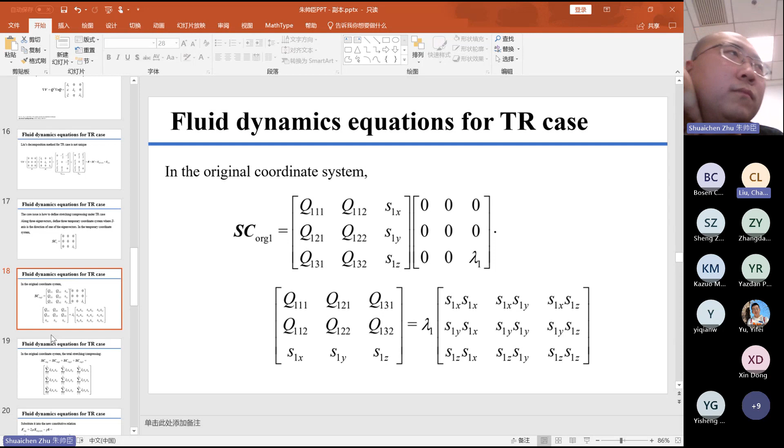Yeah, but Ma did, I think Ma did, but you can read his talk. I think his opinion is unique and consistent, I think. Well, it can be discussed later, but apparently we have such problems. Okay, yeah, sorry to give some comments. Okay, thank you for your suggestions. Thank you. Okay.

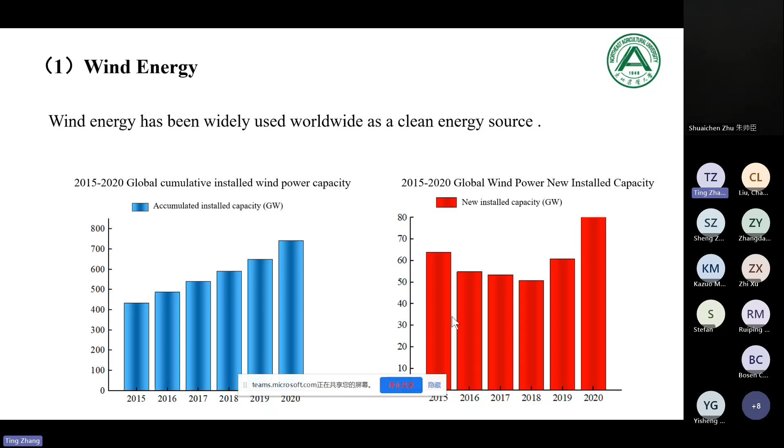When supercooled water droplets come into contact with a solid surface, it is known as ice.

The harm of ice to wind turbines is significant, including its impact on the aerodynamic performance of blades. Ice on wind turbine blades can greatly reduce their aerodynamic characteristics, leading to a decrease in wind turbine output power.

Ice formation on wind turbines can also increase their load, affect the structural safety of wind turbines, and thus reduce their service life. In addition, when ice falls off the wind turbine's blade, it can also pose a serious threat to nearby personnel.

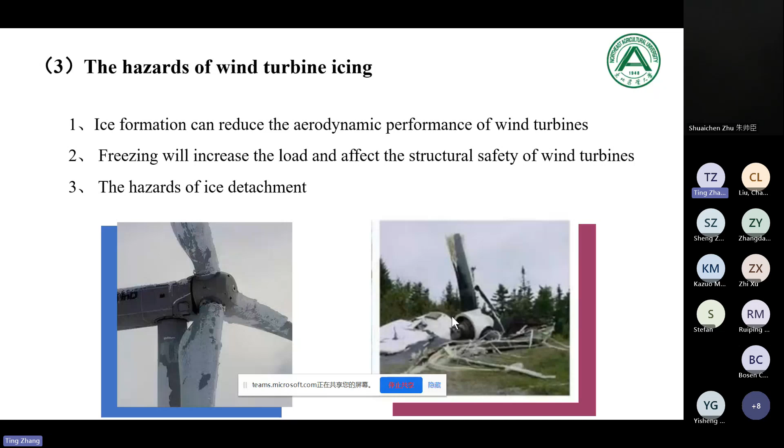The existing de-icing methods mainly include 3 categories. The first type is mechanical de-icing, which mainly uses manual de-icing equipment for de-icing. This method of de-icing has a high labor intensity and a high risk factor.

The second type of method is active de-icing. This method mainly includes actively de-icing the blade through heating methods, such as internal heating of the fan, internal electric heating, and external electric heating. This method requires a large amount of heat and needs to be considered based on comprehensive factors such as system complexity, cost, and heating efficiency, according to the actual situation.

The third type of method is anti-icing, which refers to coating the surface of wind turbines to reduce the adhesion of ice to the substrate surface. This method is low cost and widely used, but over time, the anti-icing coating is prone to detachment and failure, and the anti-icing effect of wind turbine blades will become worse and worse.

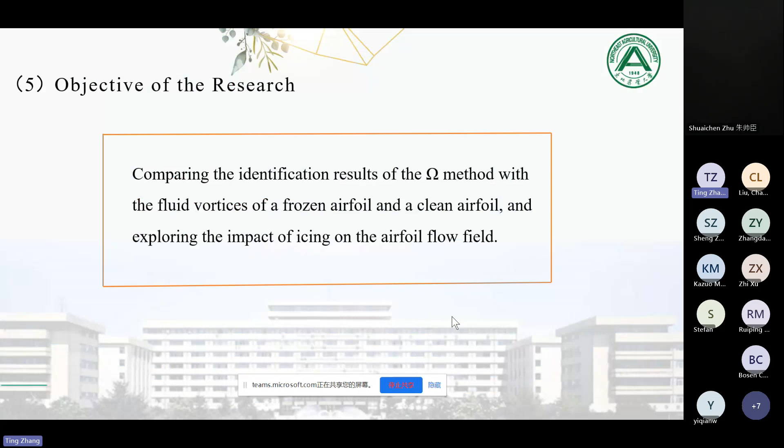In this study, Fluent software was used to simulate clean and iced airfoils, and the simulation results were identified using the Omega method to investigate the effects of icing on the flow field of the airfoil.

The next part is the research content. Conduct icing experiments using an icing wind tunnel and record the icing process of the airfoil using a high-speed camera.

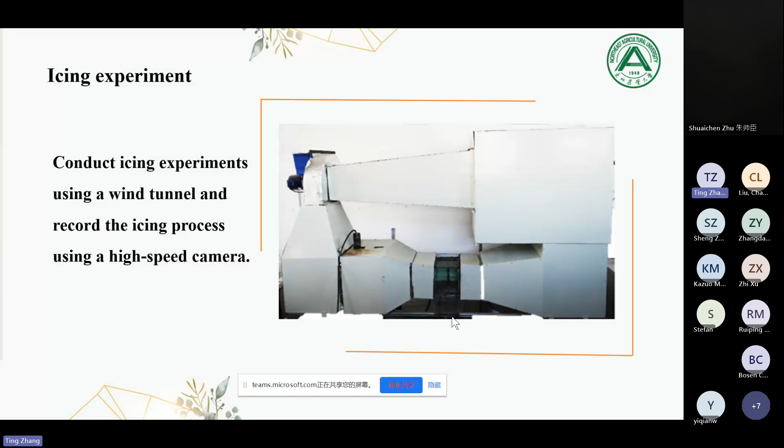Export the images from the camera. Use software to process the icing image into data. Use modeling software to model and obtain a model of the iced airfoil. Import the built model into ICEM software to draw a grid.

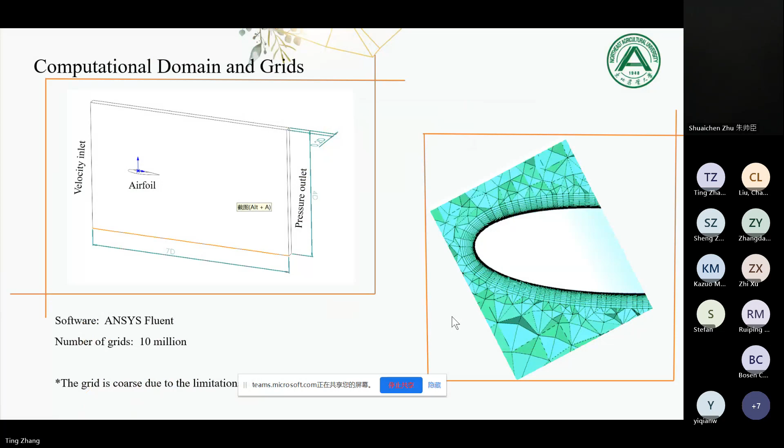Then use Fluent software for simulation and process the simulation results using the Omega method. Next, the third part is the results.

This is the vortex diagram of the clean airfoil and the iced airfoil. It can be seen that the vortices are dense in the first half of the clean airfoil surface, sparse in the second half, and dense on the entire airfoil surface of the iced airfoil.

This is the vortex variation of the cross-section of the airfoil, which shows that the surface of the iced airfoil has more vortices than the clean airfoil, and the tail vortices have more vortices, which are more complex.

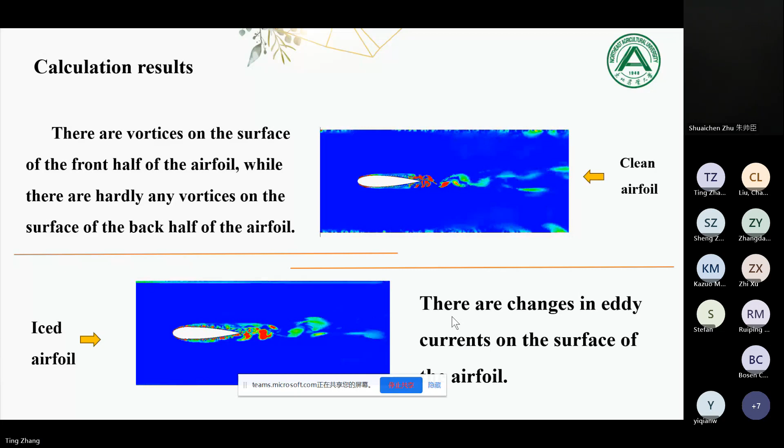This is the vortex diagram of the suction side of the clean airfoil and the iced airfoil. It can be seen that compared to the iced airfoil, the vortex distribution on the leading edge surface of the clean airfoil is more uniform.

Compared with clean airfoils, the vortices in the latter half of an iced airfoil increase, and the changes in vortex become more complex.

This is the vortex plot on the pressure side of clean airfoils and the iced airfoil, compared with the vortex plot on the suction side. The vortex in the latter half of the airfoil is less. From the vortex plot on the pressure side, it can be seen that the vortices become detached from the airfoil, resulting in fewer vortices on the surface of both airfoils.

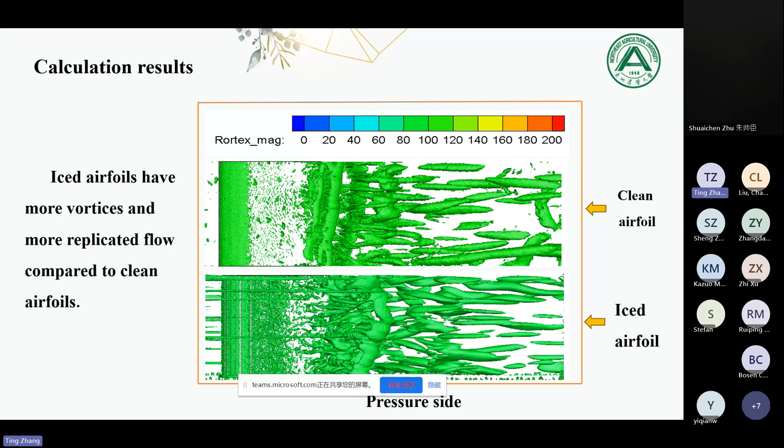This is the front view of the vortex mass for clean and iced airfoils. It is evident from the figure that the vortex on the surface of the iced airfoil increases significantly compared to the clean airfoil, and the vortex in the wake of the airfoil increases, resulting in more complex changes in vortex.

The last part is a summary. In this study, the Omega method was used to identify vortices in the flow field of iced and clean airfoils.

The research shows that icing has a significant impact on the flow field around the airfoil, and the distribution of vortices at the icing point is uneven due to the impact of icing on the flow field of the airfoil. The vortices in the latter half of the surface of the iced airfoil increase.

The number of vortices on the surface of an iced airfoil increases compared to a clean airfoil, and the vortex changes in the wake of the airfoil are more complex than on the surface.

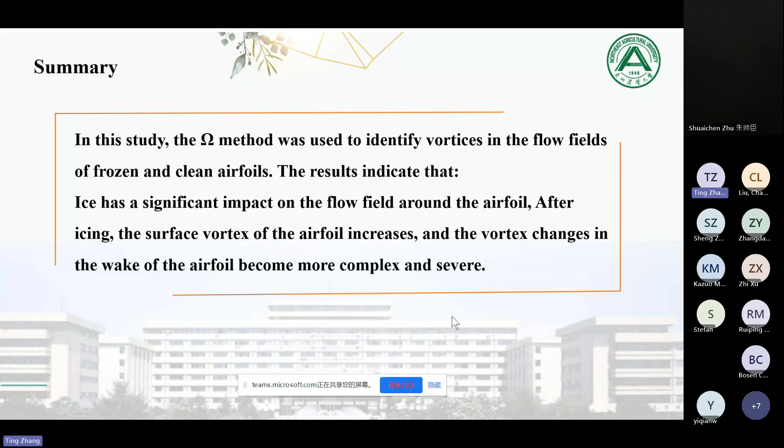My report ends here. Thank you very much for listening.